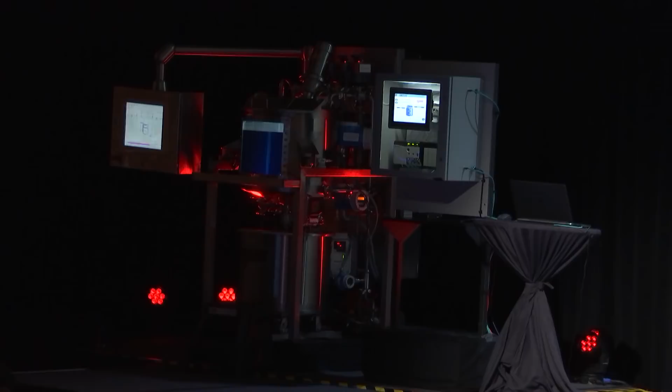On my right, we have our mixing system. It's comprised of several pumps and an agitator. They're all controlled by PowerFlex drives. It has a full assortment of instruments from E+H, flow transmitters, temperature sensors, all sorts of stuff. Everything's attached to a Logix controller, and there's a PanelView 5310 for the operator to interact with.

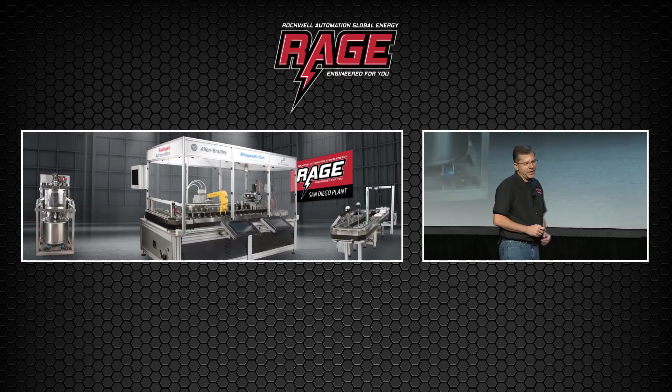We couldn't bring the bottling line with us, wouldn't fit. It's here in the middle of the stage. The last step in our manufacturing process, it's the packaging area. It's here on my left. It's state-of-the-art. This is a very special machine, and we'll be showing you later what makes it really smart.

Just like at your company, at Rage, our success starts with the talented automation engineers that make everything happen. And we have a standout team. Jonathan's the driving force behind several of the analytics products we use at Rage. He joined Rage after spending time with both Microsoft and Amazon. Julie knows a lot about making things. She spent the first decade of her career working at a pharmaceutical company. She joined Rage in our solutions business, and today is the business manager for design software.

At Rage, service is important, and that's Sherman's role. He comes to it pretty naturally, having been part of the team at Rockwell Automation that expanded their managed services offering. Like all lasting relationships, I first met Andrew in a bar more than 30 years ago. I was a first-year engineering student, a frosh. Andrew was much older. He was one of the engineers tasked with teaching the frosh what being an engineer really meant. He helped me then. He's been helping me ever since.

So how do we tell our story about Rage? Well, a good story's got three elements. It's got to have a villain. It's got to have a hero. It's got to have suspense. A villain? We'll find one. A hero? That's easy. That's the Rage Automation team. And suspense? We're at TechEd. This is live. It's plenty of suspense for me.

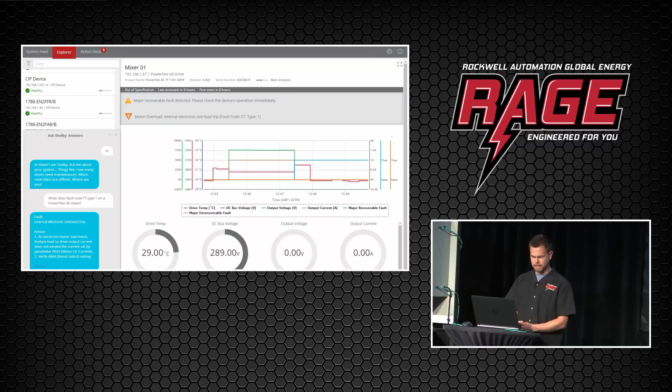What does fault code F7 type 1 on a PowerFlex 40 mean? There's an excessive motor load, so the drive is probably tripping to protect the motor. This is something that wouldn't clear up normally on its own. Has someone been resetting the equipment?

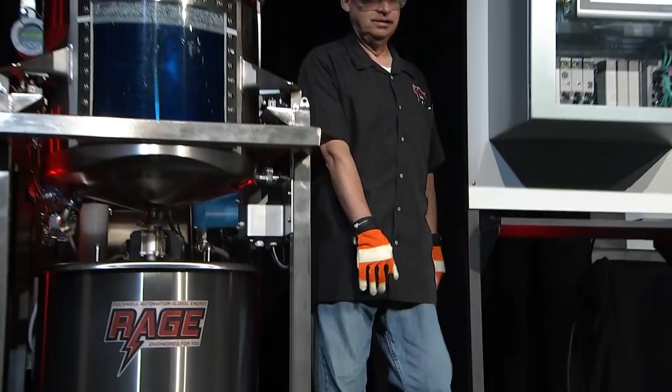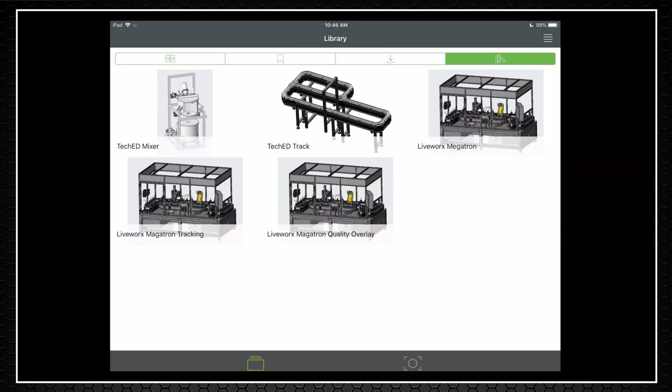Thanks a lot, Trouble. Maybe instead of just clearing these faults, we should try to find the root cause. But this is a pretty complex machine, and I don't want to take it down for maintenance until I know where to look. Fortunately, PTC has provided me with an augmented reality view of this machine. So I can start my investigation with a 3D model.

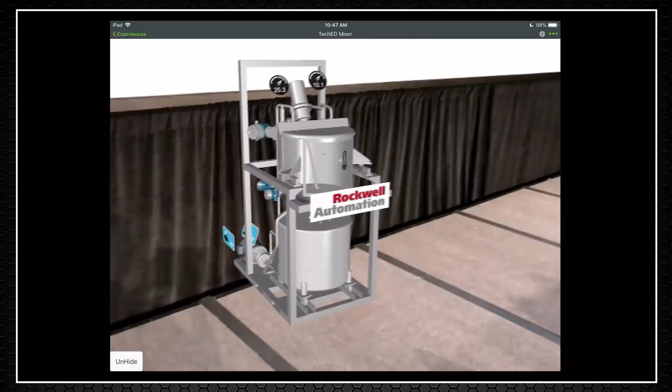I'm going to start by placing the model in real space. Zoom in a little here so I can get a closer look. I'm going to spin it around. There's the motor, so this must be the drive. Andrew, I think this is where we should start our investigation.

Hey, that's pretty cool. I can really see how AR and integrating with our analytics is a powerful combination. But I got to ask, how hard was that really to integrate those two pieces together? It's actually really easy. The modern REST APIs in FactoryTalk Analytics make it simple to pass the data it finds up into other systems like ThingWorx.

It reminds me, our power consumption on the mixer has a strong correlation with product quality. Wouldn't it be great if we could compare actual power consumption with predicted power consumption? What do you mean? Well, we already measure our actual power consumption when we're running batches using our power monitors. But would it be better to have some sort of power reference so we'd know if we're doing a good job? Then a comparison could help us find the right settings for each mix.

What do you think? Yeah, I see what you're after. I'll bet that's something we could do with our new Sherlock module. Project Sherlock is a new analytics add-on for ControlLogix that watches data produced by a control operation and uses artificial intelligence to predict values and detect anomalies. With its unique physics-based approach, the Sherlock AI is particularly well-suited for manufacturing problems.

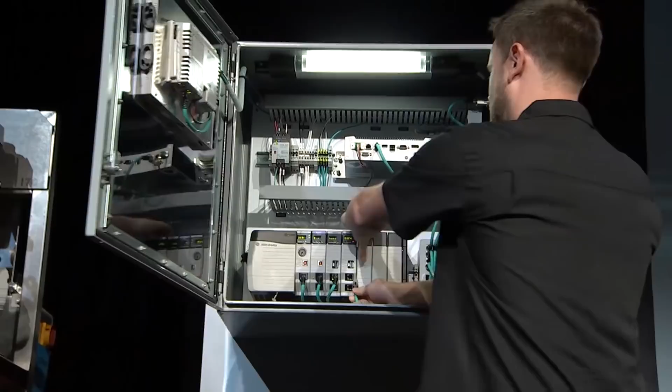I'm going to start by adding the module to my ControlLogix chassis. And I'll connect the Ethernet cable directly to my PC. And just like Shelby, I'm going to use a web-based interface to configure my analysis. I'm going to create a new prediction for our mixer using the application running in controller slot 0. I'm going to predict power.

Sherlock needs to know what tags to look at, so I'm going to tell it about my mixer. And it wants to know, to start, what is the thing that I'm trying to predict. So I'm going to give it power and give it the normal bounds of operation. This is a heavy-duty mixer.

And then I'm going to give it any variable that I think might be related to our power. I can cast a wide net here. Sherlock's smart enough to figure out what really matters on its own through observation. So I'll give it speed and I'll give it torque.

The other thing that might be useful is understanding what product we're producing. Because the physics of each of our products is slightly different as it's being mixed, Sherlock's smart enough to create a different model for each of those different products.

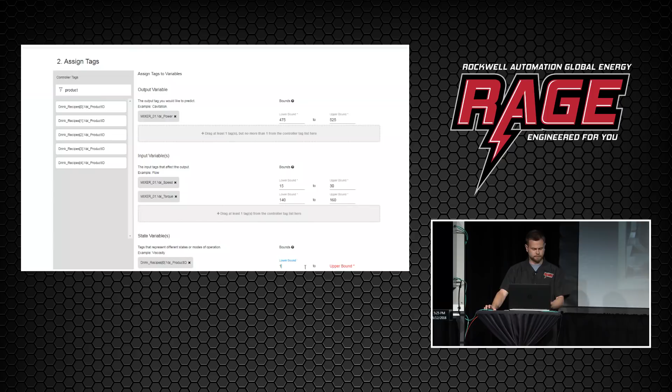After I confirm my settings here, I can return to this detail page and save an L5X. This is a code block that contains a UDT that Sherlock uses for its predictions. I can import that UDT into my control program, and that will add the tag that Sherlock writes to. It won't touch any other tag in the controller, but it will observe them and write its predictions into this type.

There'll be a brief training period that we're going to fast forward through here today. During this training period, Sherlock is watching the application, learning from it, cleansing the data, and building and testing models until it finds one that can predict the process.

When it's done, I'll have a tag here that contains Sherlock's prediction that I can monitor in real time. We chose to implement this on our HMI, so I can see the predicted versus actual at an operator level display.

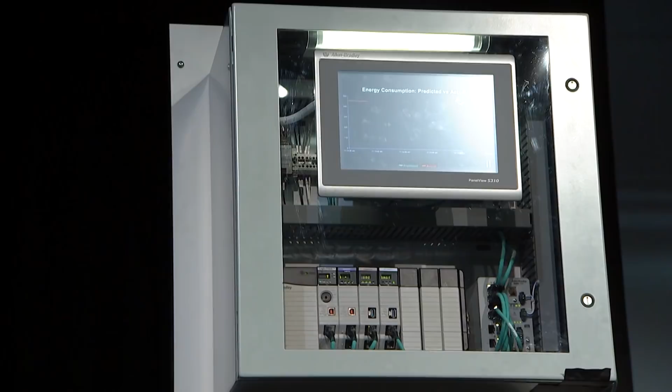But we could also use this value in our control logic if we want to tune the process. We can historize the value for analysis later, or we can pass it up to a display like in ThingWorx so we can see this at our overview screen.

Now that we have data flowing from FactoryTalk Analytics for Devices, monitoring the parts of the machine, and we have Sherlock and AI monitoring the actual application, this has become a pretty smart machine. But I'll bet there's more that we can do. Hey, Julie, weren't you telling me about a new condition monitoring system we've been learning about?

I sure was, Jonathan. Did you know the way we used to do predictive maintenance was to physically walk around each piece of equipment once a month? My friend Rubble, he's actually a vibration expert. He'll walk up to the machine, which isn't always this easy to get to. He'll take measurements all over the machine, and then need to use some really complex software to study the vibration. He'll look at each signal.

He'll do some crazy math, like fast Fourier transforms, to figure out every which way the machine is vibrating, and then try to figure out what it is that's causing it to shake at those frequencies. But even after all that, we still might have failures now and then if one happens in between his monthly survey. Julie, would you really be able to look at that and predict a problem with a machine or know when to do maintenance? No, there's no way.

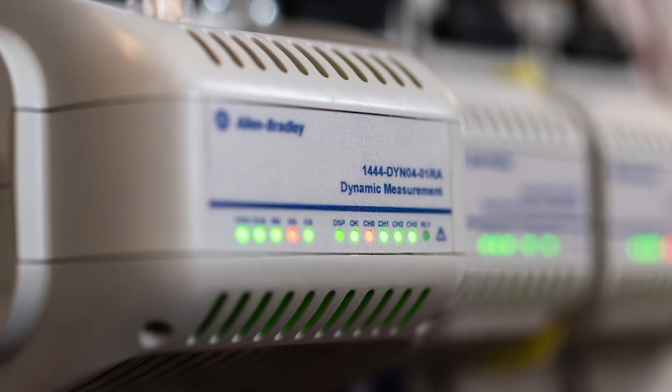But the good news is, with Dynamix, we have a much simpler way of doing these things today. Integrated condition monitoring takes the complexity of vibration monitoring that in the past required a very specialized skill set and turns that into simple tags, integrated into Logix, and visualized on the HMI. In doing this, I can combine the power of vibration analytics with the process expertise that I have and choose what action to take if something happens with the equipment. So Rubble, now that you don't need to do those surveys anymore, you can focus on some other productivity projects I have in mind.

So Jonathan, like Project Sherlock, Dynamix is a system-level analytic. But this is built specifically for rotating and reciprocating equipment. It can do a lot for us. It can protect our high-value processes and equipment, resulting in more consistent quality and predictable maintenance. This is a big deal because Ted keeps reminding me that this line is critical, and if any part of it has a problem, we need to know about it now.

So for the pump here on mixer 1, I want Dynamix to tell me what's going on. Is it running okay? And if something is going to go wrong, it will alert me so that I can deal with it. I can adjust process parameters to stop cavitation or turbulence. Or if it's mechanical related, I can plan maintenance. Or if it's an electrical fault, I can schedule time to swap out the motor. But bottom line, whatever it is, I can deal with it before it shuts us down. So let's take a look at those tags in Logix Designer.

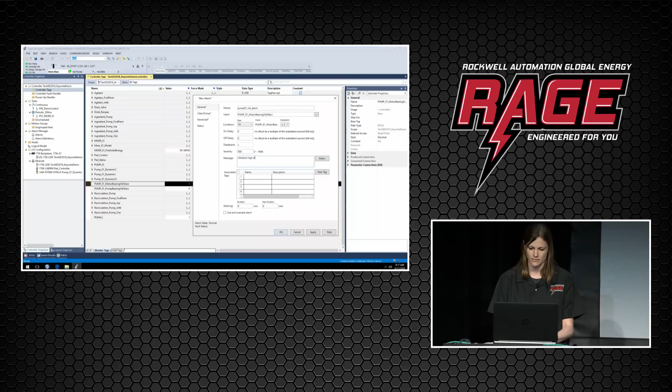I can simply right-click on the tag. I'm going to say Add Alarm. I'm going to type in a description. And then I'm going to set the condition to high. I'm going to type in a message. And click OK. And then I'm going to go over here to my alarms. And I'm going to click this checkbox to say use it. And that's all there is to it. And once created, this alarm will now automatically propagate to my PanelView 5310 with no extra configuration required.

There you go. Now that's simplification. And they're not just easier to configure, they consume considerably less memory, and they don't impact my performance at all, even if I get a burst of several alarms. So Ted, as you can see, the analytic capabilities of Dynamix and the simplification of the new tag-based alarm capabilities integrated with PanelView 5310 have significantly improved the intelligence of this machine.

Thanks, Julie. That's pretty exciting stuff. I want to highlight a couple of the things that Jonathan and Julie showed. Blake and Frank both spoke about the value of simplification. The team at Rockwell showed several examples of analytics where simplification came from the integration into the architecture. It puts the power of the analytic in the hands of the automation engineer. It makes it useful to them.

What action should be taken? What should be done with operations? What does the operator need to know? How quickly should the system respond?

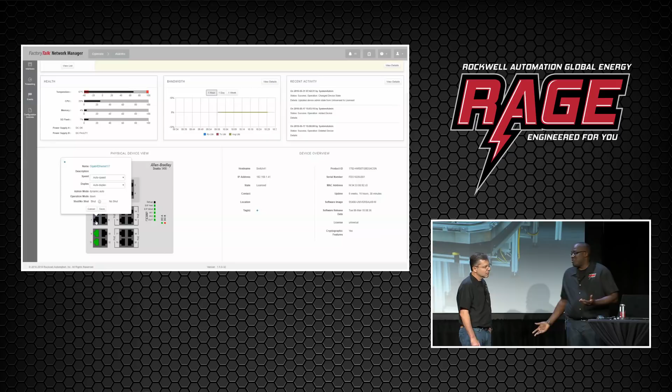Now this screen is great because it gives us a view into our network, our switch health and performance and status. Rockwell let me know that they shut down one of the programming ports. This is the one that we have designated as our program port. And as you can see here, that port is now shut. That was the port that was attempting to propagate the ransomware. So how was Rockwell able to detect what Rubble was doing so quickly?

So remember, Rockwell has resources monitoring our network 24/7. And they use a tool by a company, Claroty, that allows them to detect these anomalies when they happen, and they have a robust incident response plan to take action as soon as they see those. Let's take a look. So here's Claroty.

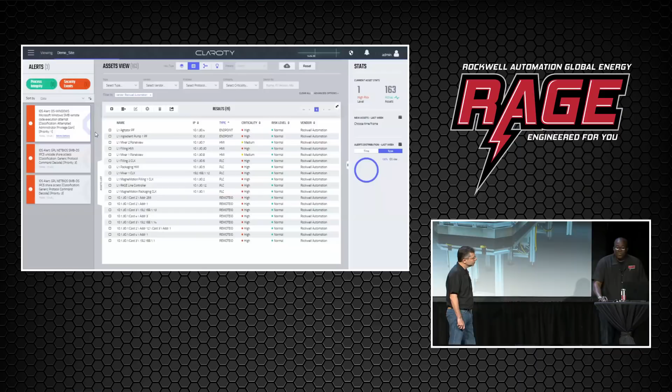In the center, you can see it has gone out and automatically looked at what assets we have on our network, but it's also looked at the traffic that those assets generate and baselined that traffic. This is great because it can look for any changes in traffic patterns, any anomalies, any new assets that are coming on the network, and any bad behavior that's happening from those assets.

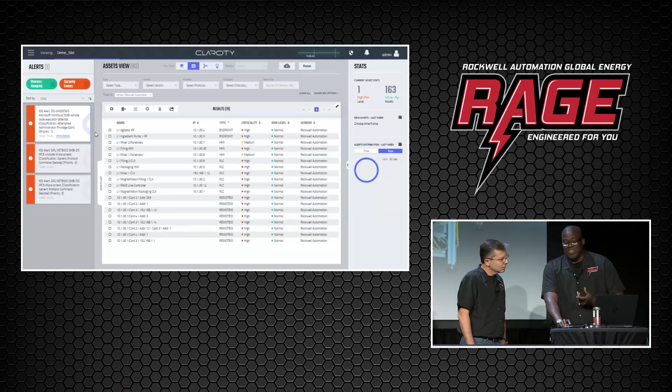On the left-hand side, you'll see the alerts and alarms that are being generated. These are the alerts that Rockwell sees and that they take action on. Let's dive a little bit deeper. So this screen is great because it shows detail on the specific alert and alarm. This in particular was Rubble's laptop attempting to propagate malware to our packaging HMI. They took action, shut the port down.

Our next steps are to get Rubble's laptop to IT, get it wiped, and maybe we'll let him bring it back on the network. Let me know if IT wants to borrow my hammer.

Sherman, thanks. I really see the value to Rage of having Rockwell monitor our network 24/7. I know you and your team have to sleep, and our production lines can't stop. Sherman emphasized the importance of having a plan, having modern network infrastructure, and ensuring that we're running the current versions of firmware and software. At Rage, that's been hard. Lifecycle management's a real challenge.

Tracking the changes that are made into our different systems, even knowing what automation assets we actually have, finding the time to update our software and firmware. Even during shutdowns, our production and maintenance teams need the equipment to be operational. At Rage, we're continuously making changes to increase capacity, support new products. You get the idea.

Julie's responsible for all of the automation systems at Rage. She has dozens of control programs to manage, hundreds of devices that are all networked together. They all contain firmware. How does she manage them? How does she monitor the changes that her team makes to support the needs of production? How does she ensure that we're running the current version of software and firmware? Julie, how do you do it? Well, Ted, I'm glad you asked.

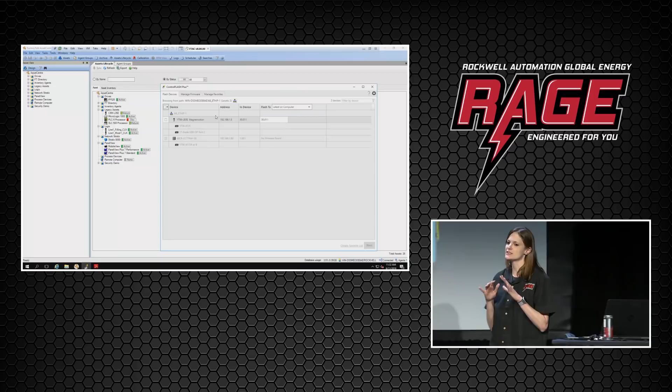It's okay. It's way simpler now. So we can do that much more easily now with Control Flash Plus. I can download the firmware from PCDC, then use Control Flash Plus to update all the devices on the line in one single operation. Then I can update my favorites list so that this firmware is available when I get some time over on line 2. I can push the same firmware over there, and we're good to go. Thanks, Julie. It looks like you've got everything under control with our systems. Thanks.

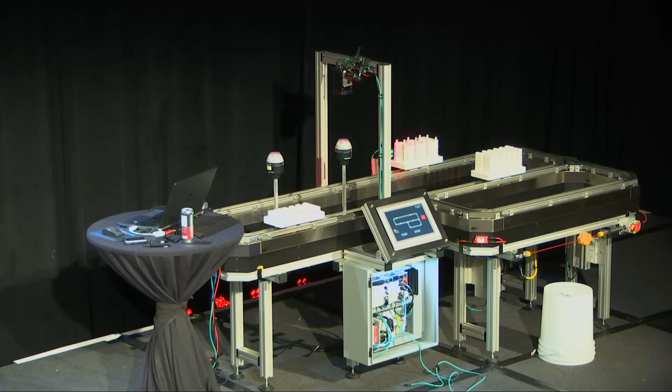Well, I've been talking with Julie about lifecycle management. Andrew's been monitoring our packaging system. It's one of the newest pieces of equipment we have at Rage, and it's a really smart machine. The first thing you'll notice about this machine is it's built around Rockwell's independent moving cart technology. It's increased our throughput. These carts are really fast. They can move up to 2 meters a second. But just as important, independent cart technology has given us a lot of flexibility in how this packaging machine works, allowing it to quickly adapt to changing requirements.

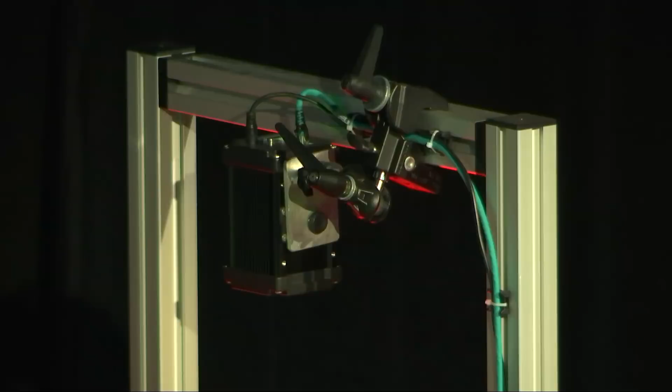Each cart or carriage is controlled separately by Logix, allowing the machine to make smart decisions, including when it detects that something's wrong. This machine's kitted out with some pretty sophisticated analytics. It allows the machine to do something that we call completeness checking of the finished product. This machine won't ship a bad package. There's a sensor here that looks down on each cart as it goes by. It's an ODOS imaging 3D sensor. It's a new technology from Rockwell.

The sensor looks at the cart as it goes by, and it creates something called a point cloud. The point clouds pass to the compute module that's running in the Logix chassis. That's where the 3D analytics run. Each cart also has a barcode on it, so the Logix controller knows what package is supposed to be on that cart, and it passes it to the compute module. The 3D analytics on the point cloud determines what's actually on the cart and passes information across the backplane back to the controller to tell it whether it's good or bad.

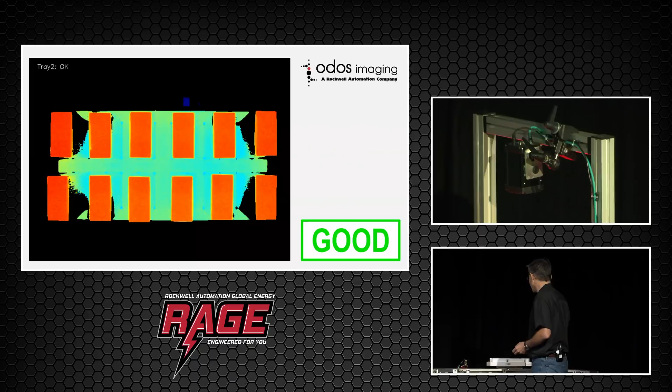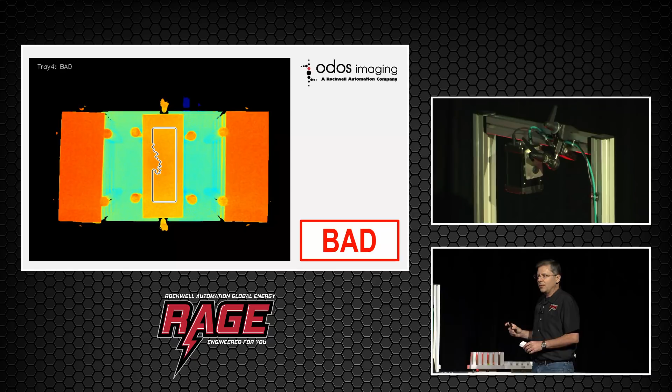So let me try to screw up the packaging machine. So I'm going to take off one of our packages, and the machine will detect that that cart doesn't match what Logix expects it to have on it, and then it will automatically reroute this cart for rework, making it a very special machine. The ability to do completeness checking on the machine itself really shows the value to Rage of the scalable analytics and the scalable compute that Frank spoke about earlier.

As you've seen this morning, the systems we use at Rage generate a ton of information. I'd like to show you how we've aggregated all of this data together in order to do enterprise-level analytics. How does the performance of our line here in San Diego compare to other facilities around the world? Are other production lines seeing similar challenges that we had on our mixer earlier? How does our energy consumption compare?

At Rage, we do a lot of analysis to ensure that we're continuously improving, that we're taking advantage of what we learn at every site around the world. Andrew, how have we integrated all of these systems together? Thanks, Ted. We've integrated the PTC ThingWorx platform along with our FactoryTalk Analytics platform to develop a solution that enables our plant operations, IT, and maintenance staff to monitor our facilities to ensure we're meeting our production and quality goals.

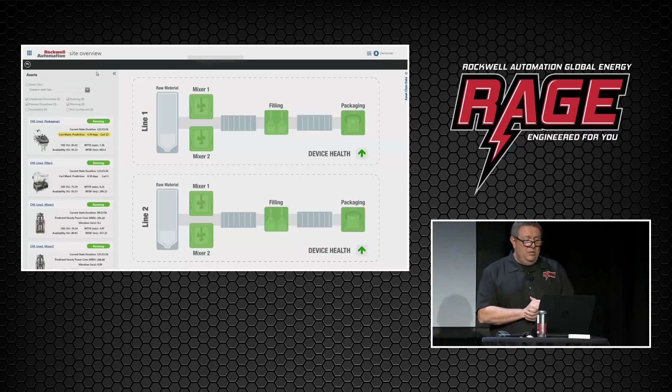There are many data sources and systems that feed into the application in order to provide a holistic view of our plant operations. Let's take a closer look. So I've navigated to the, let me get full screen on this, to the PTC ThingWorx main page. I've got my 2 lines running here. You can see the configurations of both. I'm going to navigate to the mixer.

And you can see we've already incorporated the power consumption prediction that we saw Jonathan provide. We've got vibration. That looks like it's addressed as well. And if I move over to the packaging line, you can see that even our device health is looking good as well. So Ted, I think everything's looking pretty good. Andrew, why is this packaging machine yellow then?

Hey, you're pretty observant. You must have had some great, slightly older mentors in your career. Good mentors are good. Good question, Ted. Good question.

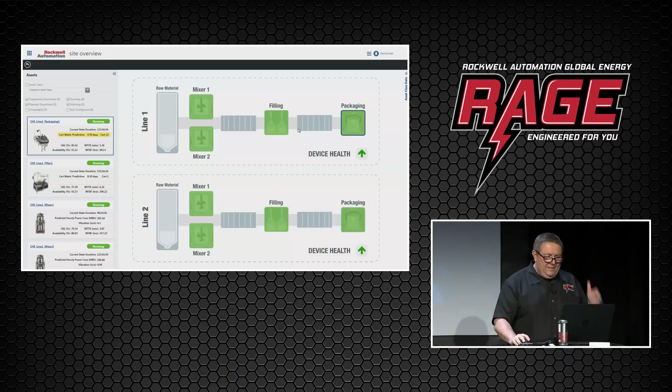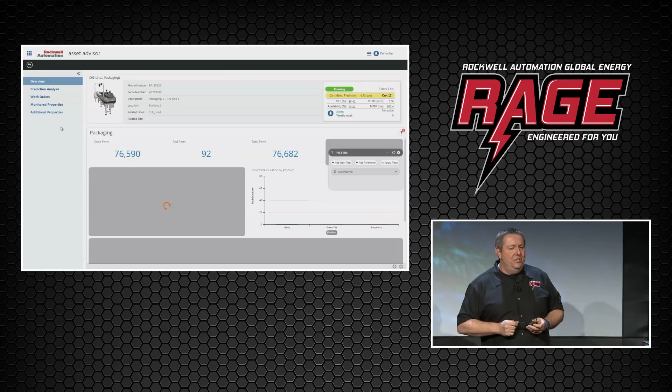So let's take a deeper look on that, because that is concerning. The yellow is a warning indicator. So again, I'm going to click on packaging, and I'm going to drill into the packaging machine here to get some deeper looks at what's going on. So data and system screens can be mashed together to provide a common interface specific to the packaging machine. On the left, we have links that take us to various aspects of the machine. And on the right, we have the display or the report and the analytics.

So at the top of the page, in this area here, you see some basic high-level overviews of what's going on. This is more the ThingWorx platform, showing us things like model number, serial number, and basic things like OEE and mean time to failure and repair and so forth. At the bottom, we've integrated in our FactoryTalk Analytics platform. This is a storyboard.

Thanks. I was going to say click, but I didn't.

So here we have our storyboard. This is showing us data coming from various systems, like our historian for time series data, Production Centre for MES data, really giving us the context that we're looking for to do some deep level learning. Let me do one thing here to show you what the capabilities are. So here I can see I've produced 76,000 pieces, making berry, green tea, raspberry. Those are the different flavors.

Let's say I'm only interested in the berry. I want to see what kind of issues or insights I can get by really slicing and dicing the data. So I'm going to say simply keep this. In other words, only show me things related to when we were manufacturing the berry product. So now I've filtered the entire report, all the analytics, any calculations that are done here are now updated so that I can see what's going on.

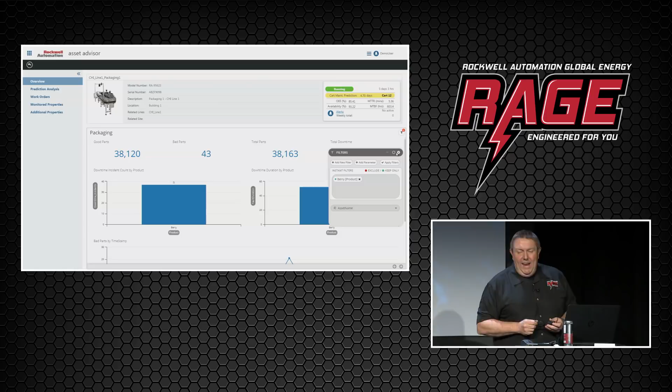But you know what? I'm a little distracted. So I really need to get back to my attention. At the top, and this was Ted's observation here, it does say that cart 12 has an issue. Now, this is one of the many carts we use in our operations to transport packages around our facilities. So let's take a closer look.

What I'm going to do is click on our prediction analysis link. And once again, I'm using the ThingWorx navigation. And on the right-hand side, I'm drilling into an analytics data view display. This is dedicated to our machine learning algorithm, which is predicting when wear plates on each of the carts will fail.

Now, although you're seeing only one of our MagneMotion machines in our facilities, we have many and hundreds of carts. Although they don't need replacing often, the replacement procedure can cause unplanned downtime that we want to try and avoid. So we developed a machine learning algorithm to predict when excessive wear on each cart occurs.

Andrew, I was going to pretend I understood what you said about machine learning, but I don't. So could you back up and explain how you did that? So let's start with the wear plates on each cart. They can deteriorate over time, and therefore they need to be replaced. And this can happen at any time.

So using the ThingWorx builder, we developed an algorithm that can predict when the cart's wear plates need to be replaced, and have incorporated this into our system. So logic controllers are capturing various data points from each cart, like distance traveled, acceleration, mass, and other data points. We use Analytics Edge to capture this data, do a first pass data cleanse, and we send it to a message queue such that Analytics Dataflow ML and DataView can use it for visualization.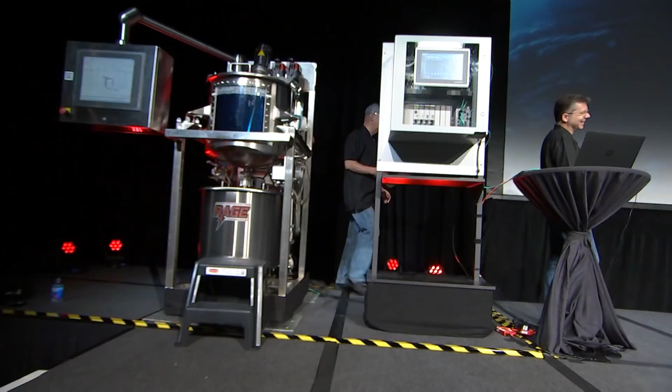This will prevent Mr. Thomas Rubble here from interfering or helping us in the future. Thank you, Mr. Rubble.

All right. Thanks, Thomas. Let's move over to the work order. So I'm going to click on the work order link, and it's going to open our maintenance management system. This screen is filtered purely for the packaging machine, so I don't have to go anywhere else. I'm just looking at the packaging machine here. And I'm going to create a work order. So I'm going to click on Create Work Order.

And again, this is cart 12. So I'll say cart 12. I'm just going to simply say PM and say Create. Now, at the bottom, you'll see there's a job plan that's pre-configured for the maintenance staff. And there's a PDF that I've just opened here that shows the process if they need more details.

Now, I can see in the future we will automate the creation of the work order to get even further efficiencies. So having access to data in an organized manner has really enabled us at Rage to truly get the benefits of a connected enterprise. Without having the building blocks of a rock-solid automation layer, pun intended, we would not have been able to develop the advanced analytics that are helping us squeeze every last ounce out of our equipment.

And with all these benefits, I don't think I'll need as many of these energy drinks anymore, Ted. So back to you. Thanks, Andrew.